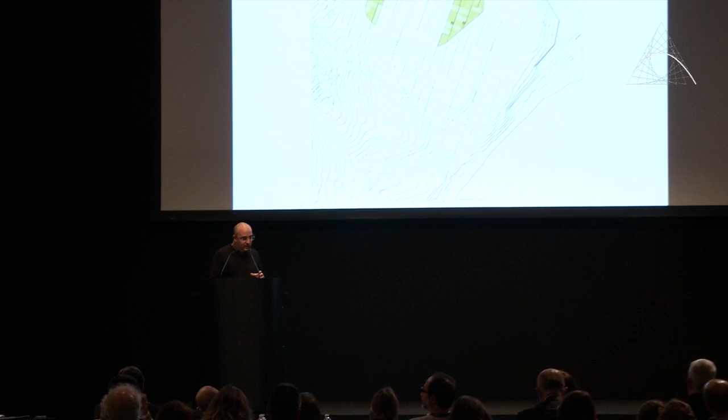This is the general plan, where the new topography gives support to our proposal. The outline of thoroughfares is maintained, while the topography is modified to suit the characteristics of each plot, depending on the framework governing the intervention, that new grid. Spaces and buildings are adapted to this new topography.

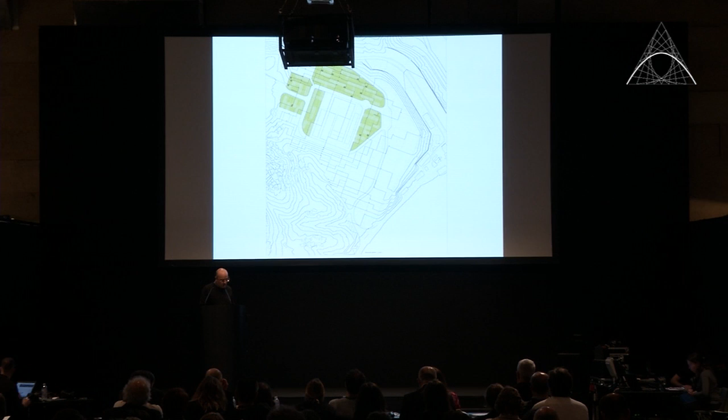We also worked on an open proposal for the whole mountain, as you see here in the different plots. The plot assigned for this project was only this one, facing north.

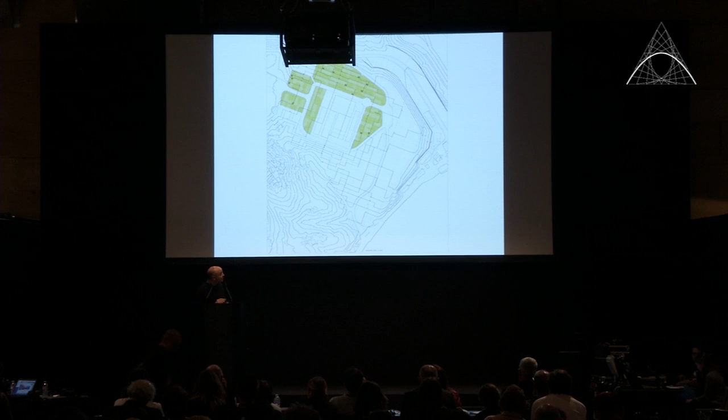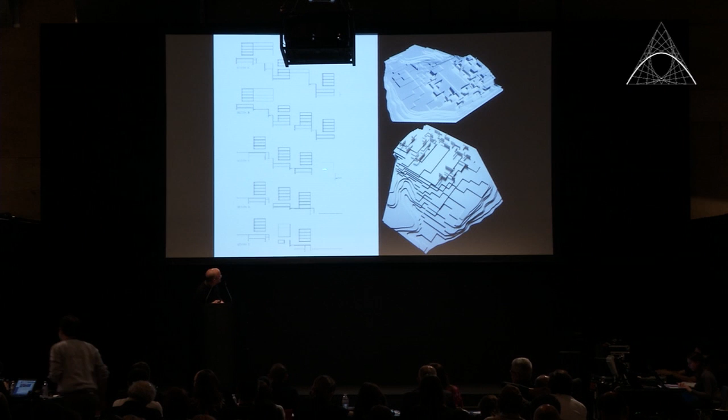It's better to see here: the buildings are proposed in a way that gives greater importance to the empty space, to the relationship with the terrain, to their own independent form. The buildings adapt to the topography, either supported or floating, as you can see in these different sections of the buildings.

They focus on the continuity of the different spaces, including the inner spaces of the building, which I will explain later.

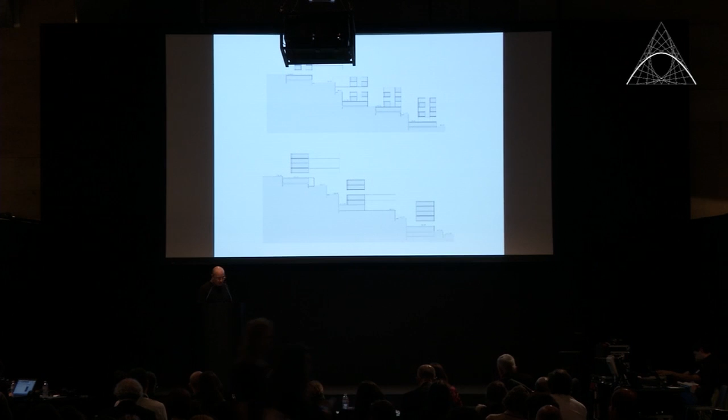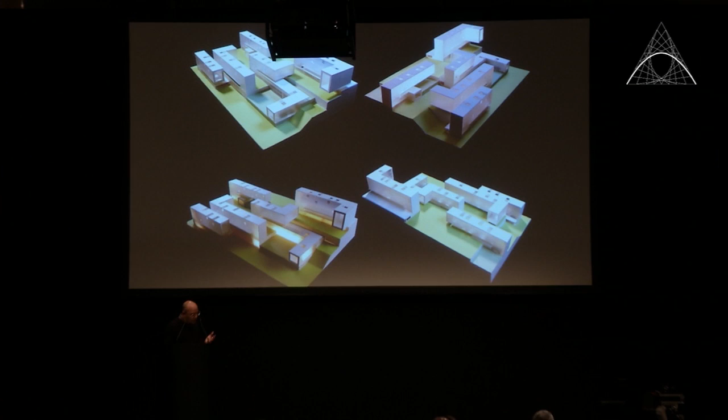This is the first model we started working on for the competition. It shows the first proposal, where the buildings use the topography to generate a special situation, carved geometrically, hollowing out or emptying the pre-existing reality. That's the idea, sculpting the buildings using that new grid we proposed.

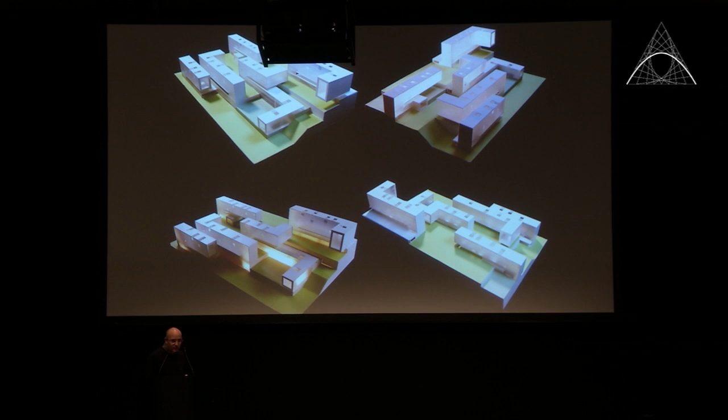Due to the sharp slope of the plot, with a 40 meter height difference at maximum, the proposal is to amend the topography by means of a series of terraces integrated into a geometric framework, with a slope of approximately 5 meters, on which the various buildings will stand.

These buildings adapt to the different slopes, adopting a grid pattern based on the grid and on orientations in relation to the wind. We also sought better orientations, spreading out in a south to north orientation, which corresponds to the main orientation of the plot.

In addition, this arrangement relates to the adjacent street, in order to allow pedestrian access to the various points of the plot, providing facilities so people can easily get inside the plot.

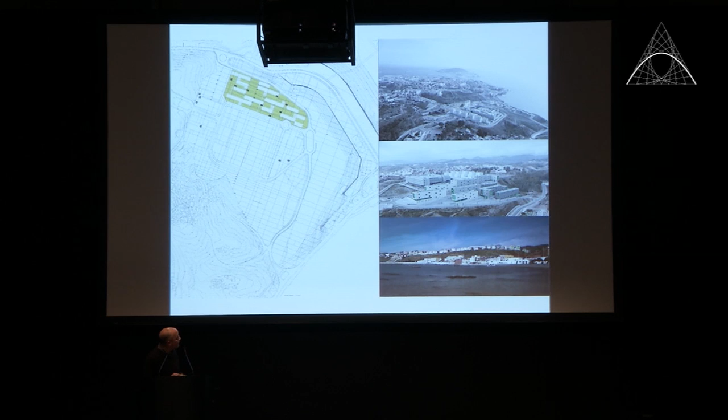These are the main drawings to understand the project: the general floor plans, section and elevation, where you can see the ground floors in the floor plans are released. Also in the sections, you can see the spatial continuity given to the streets. We didn't want to generate a closed street between the buildings.

We tried to create an independent fragment of a city that reconstructs perceptive essences associated with an understanding of the place itself, like empty spaces, squares, streets, vantage points, and courtyards that were configured as basic elements in order to define this new neighborhood.

The program is mostly residential, but it's a mixed program. We also have commercial premises in some spaces in relation with the squares we were generating inside the plot. We also have a provision of parking spaces in the basements that try to use the topography.

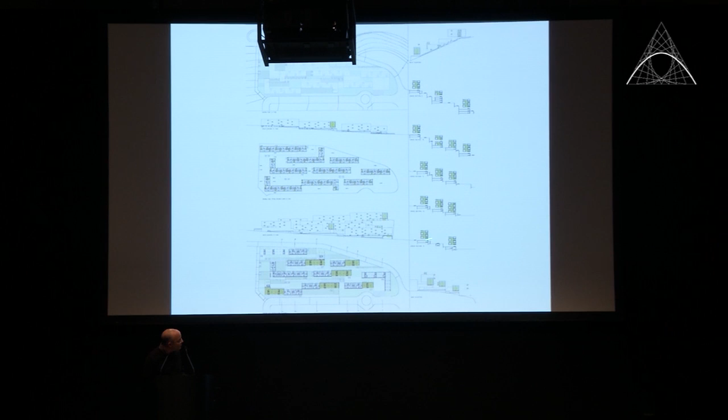So the buildings are based on a linear block system with vertical cores supplying two dwellings per floor. As you can see, the buildings are crossed by voids that in the floor plan work as courtyards, and in the elevation work as deep holes connected to the courtyards.

You see in the elevations these deep voids are connected in the section with the courtyard, as I will explain now. It's better to see in this floor plan. This is a zoom of the floor plan, just to understand this system of voids and terraces that go through the building.

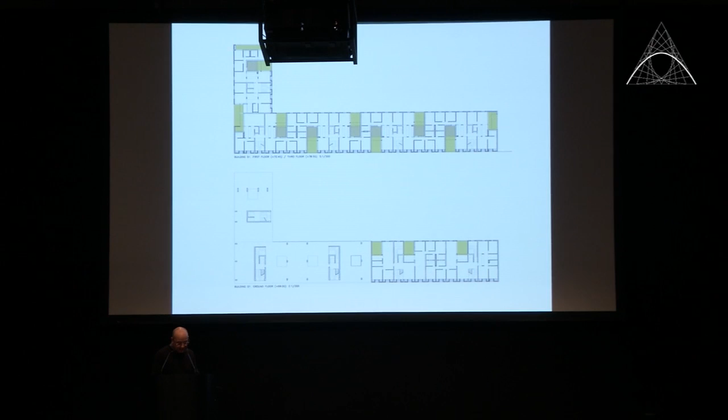The idea is a building model that aims to improve the quality of life, using a system to optimize the condition of use and energy saving, encouraging wherever possible the use of the site's natural resources. The degree to which the sun falls on the facades also depends on the orientation, north and south, and is controlled by means of a deep facade in this south orientation.

The facade is deeper on the south and less so to the north, thereby ensuring that in summer the sunlight does not directly impact the inside of the dwellings, and in winter, when the sun is lower, it shines in directly to heat the rooms. A cross-ventilation system is proposed also, since all the dwellings have double orientation.

This system is based on the inner courtyard, which is connected to the outside by terraces that change their orientation to improve air circulation and keep the homes continually ventilated.

This was the first proposal of the housing units that we made when we won the competition. As I said before, this is a project that proposes a specific approach on adapting the different buildings to the previous landscape, trying to understand the existing topography, but also trying to propose a new site on the traditional Mediterranean courtyard houses, using a modular growing system that builds drilled buildings in floor plans but also in section.

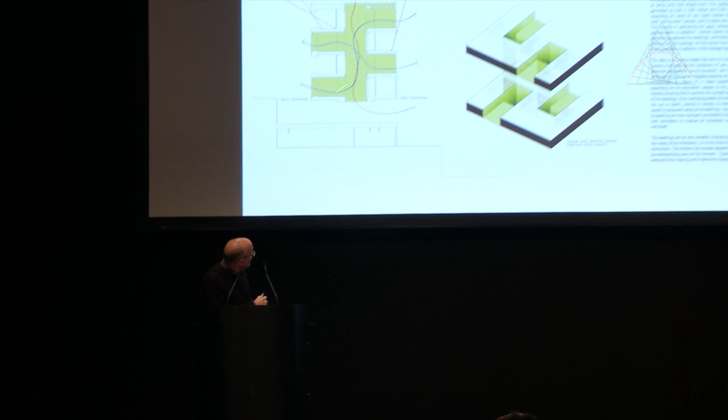All the homes have double orientation, as I said, with terraces and inner courtyards, and as you see in the section, this connection with the different dwellings in height is always ventilated and always generating internal relation for the inhabitants.

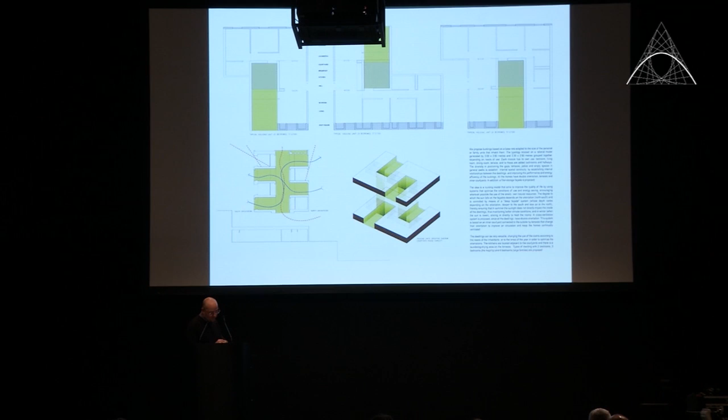And as I told you, we propose a growing system to engage the housing units, not only in the floor plans, as in this scheme, but also in the sections. Also that kind of voids were connected to the ground floors to give that spatial continuity inside the buildings through those voids.

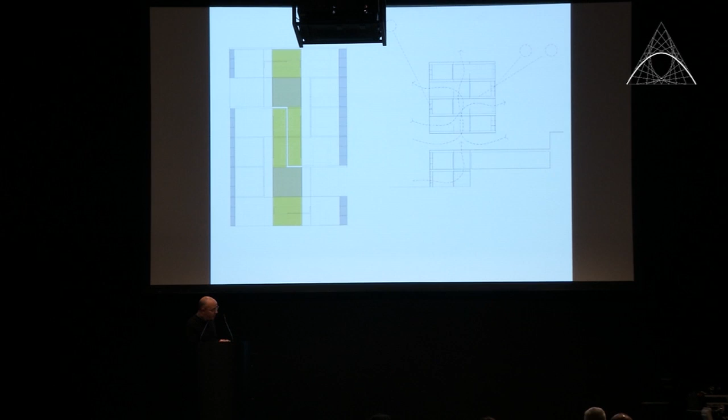So this is the final state of the buildings.

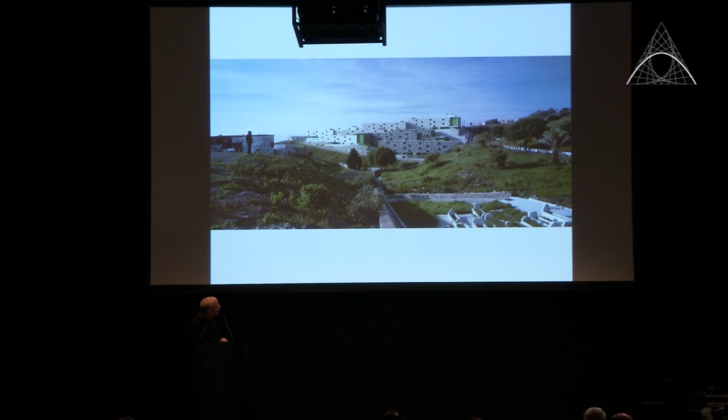It's also important to say that the buildings will be inhabited by people of different cultures, Muslim, Christian, and other kinds of cultures.

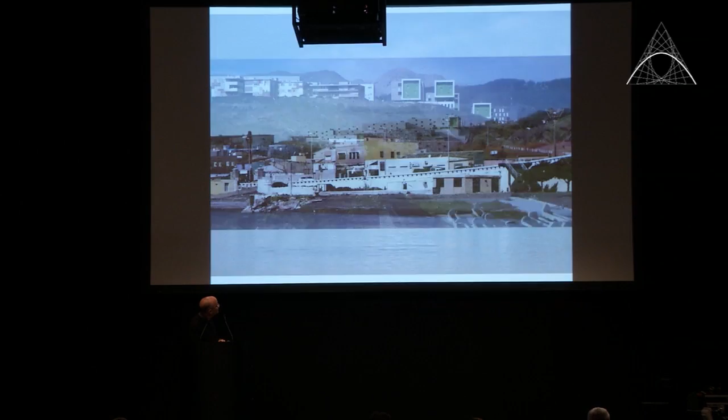This is the view from the sea. As you see, the environment is really heterogeneous, with different kinds of colors in the facades of the buildings that are surrounding the plot.

In this site, it was like the higher part of the topography, with 40 meters of height difference between the two streets. As you see, the buildings try to move over the plot, trying to breathe, trying to look for different sites.

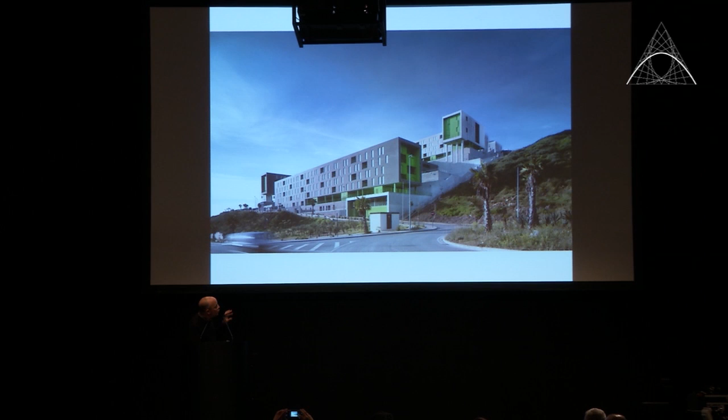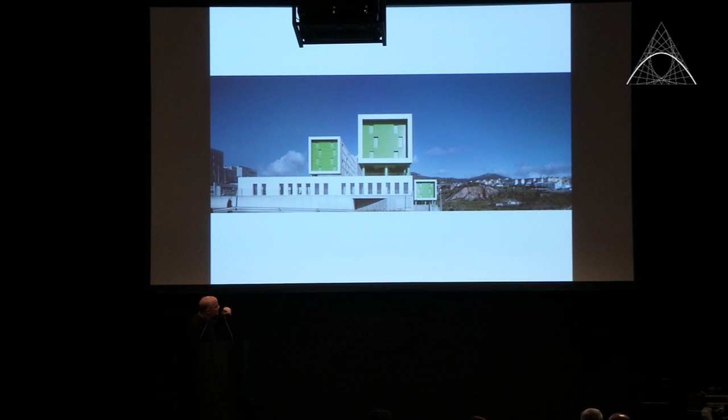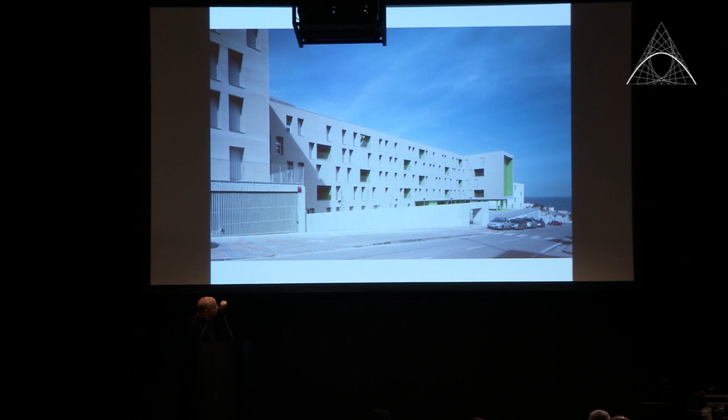These were the three main buildings looking to the sea, and this is how the buildings also try to adapt to that topography, which is changing at every point of the plot. So every building is adapted to a different situation of the topography and of the terraces that I explained.

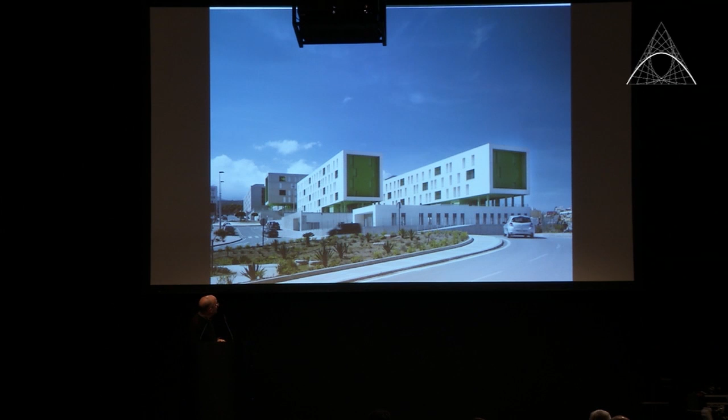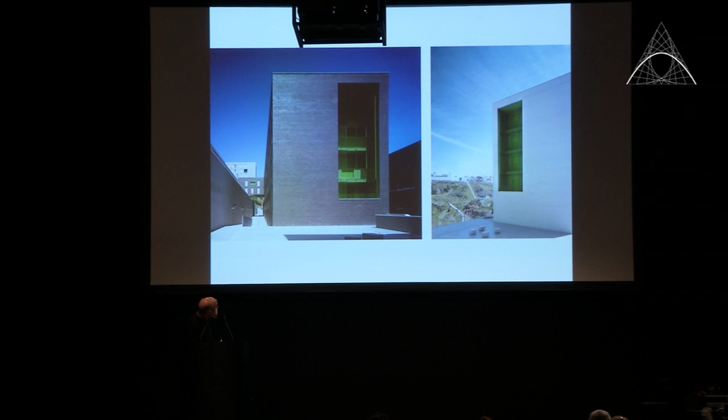As you can see here, we try to create internal squares for people, and also streets using those walls of the topography, the new concrete walls. In this photo, you can see these spaces around the buildings, also in the ground floors.

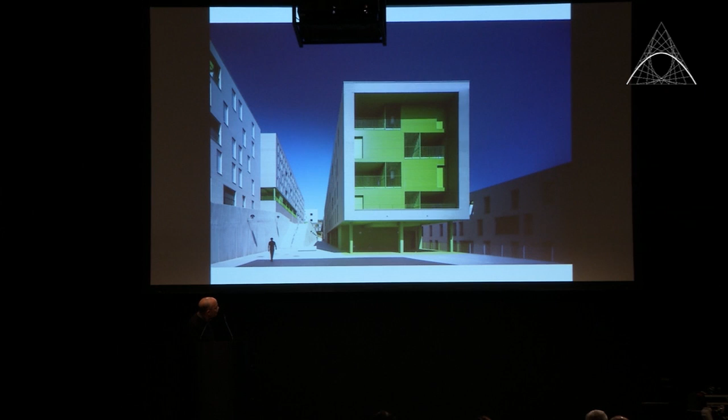This is the south type of facade with those deep voids, those deep windows. And these are the new streets that we were creating at different heights using the topography.

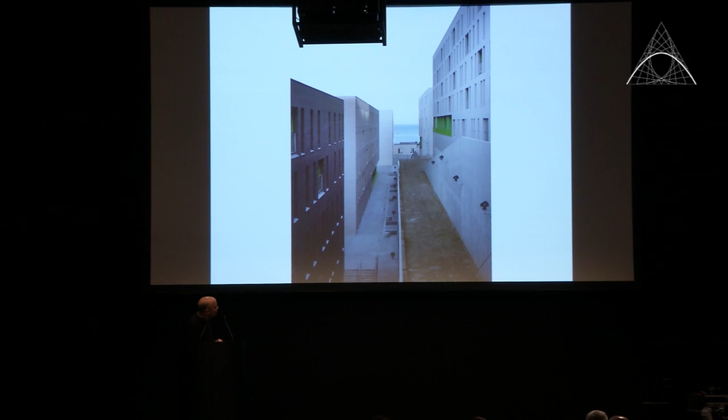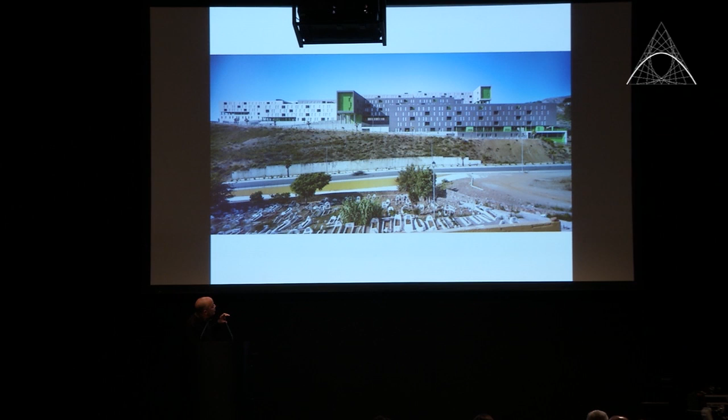These are intermediate spaces with some stairs, some ramps connected to different terraces. And this is just the final image, just to understand the whole proposal, the different buildings adapting to different terraces, and trying to look for breathing space inside the plot.